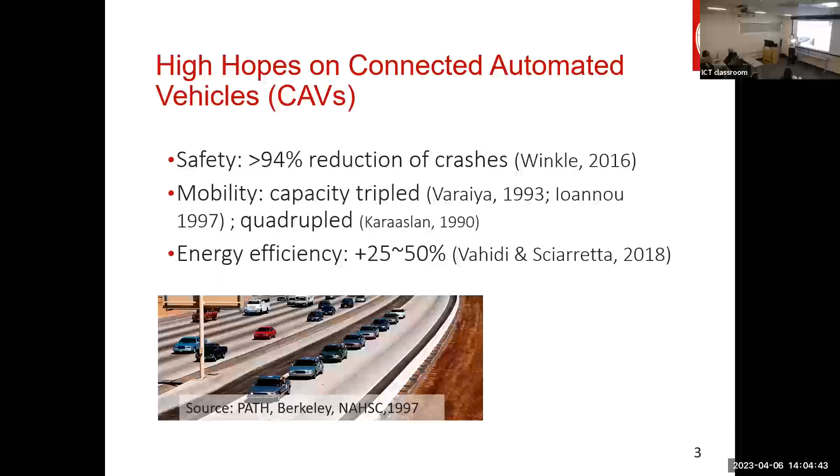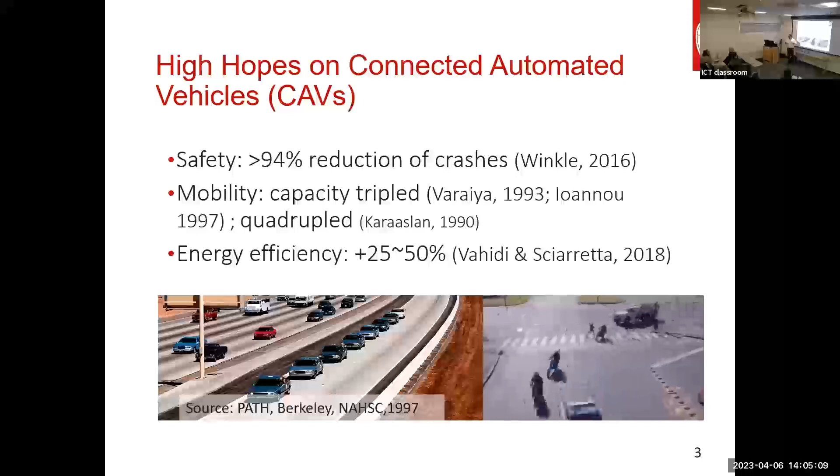What was exciting was that this technology was demonstrated like 25 years ago on a California highway. We had vehicles connected and automated, demonstrating some of these potential benefits. Back then, I think people's vision would be like this: one day our traffic could be like that, with all road users sharing the right of way harmoniously without stopping at the intersection, although I'd be scared to walk across the intersection like that. But it's computer graphics, don't worry. It shows an idea, at least from the vehicle automation perspective, of how the transportation system would be envisioned.

So let's look at throughout these 2-3 decades what happened, and there have been lots of exciting developments in the real world, right? Lots of deployment of automated vehicle technologies.

You've seen all these different brands of vehicles that have automation and provide various services, including ride sharing. Besides passenger cars, you'd see shuttle buses, micro transit shuttles and trucks, and some small delivery robots, and even for restaurants, right? They try to provide robot waiters and waitresses. I saw this in one of the hot pot restaurants in Madison. I'm not sure if you guys have it here, please check it out. So all these technologies are about automation and transportation.

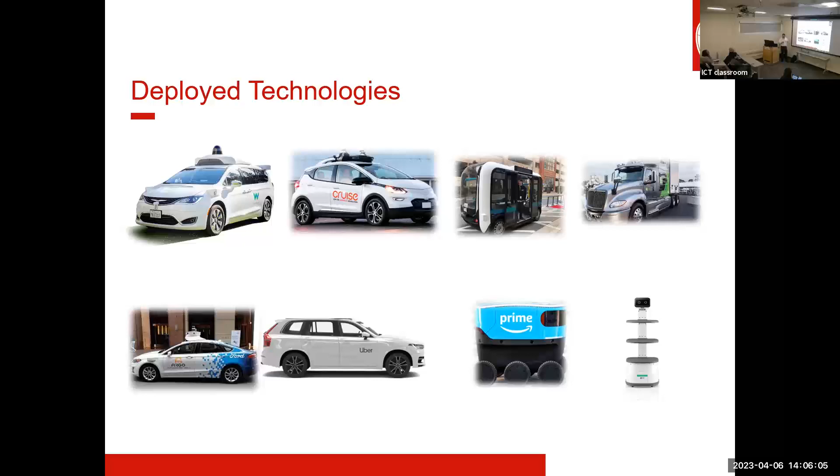Very exciting. Overall, I call them production automated vehicles, and they have grown a lot. These are the vehicles running on our roads, from 2% market penetration rate to around 10% at this time, with a projected 40% in 2040.

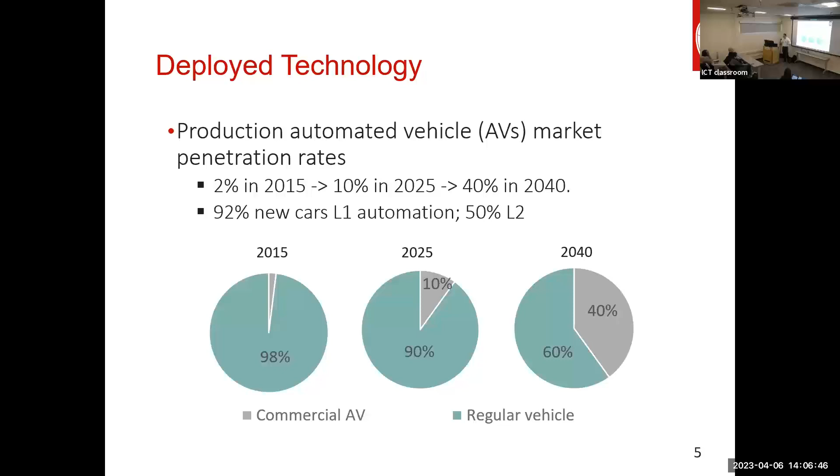If you look at newly produced vehicles, 92% of these cars have capability of level 1 automation, that is longitudinal control, and 50% of these new vehicles at least have a trim with level 2 automation, meaning both longitudinal and lateral control. The particular technology people refer to for this is called Advanced Driver Assistance Systems, or ADAS.

The longitudinal control component is often referred to as adaptive cruise control, ACC. This is basic control, controlling the subject vehicle to follow the preceding vehicle automatically depending on spacing and speed difference. Today I had a ride with Akash, and his vehicle had this function. It's like you can set it up like cruise control, but on top of that you can decide the headway of following. Normally you'll see 3 or 4 bars on your dashboard showing the headway you set to follow the preceding vehicle.

I wonder how many of you have this kind of car or have experienced it? Okay, alright, almost half, right? I would consider that great, looks like this is not a futuristic technology.

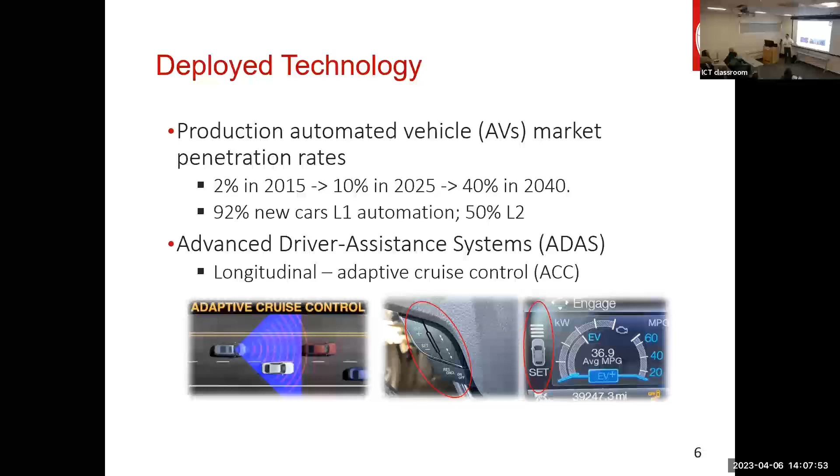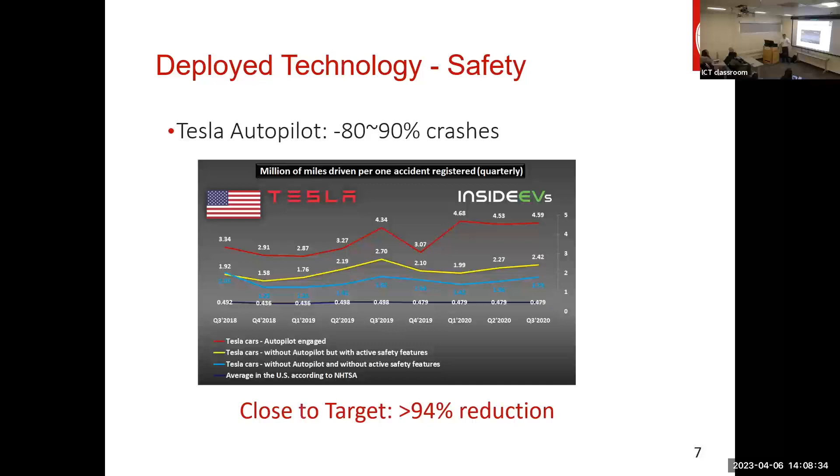Let's look at how well they perform against the high hopes I showed in the first slide. About safety, at least from self-reported data from companies like Tesla, the safety improvement is significant when the system is activated. It looks like they can reduce the crash rates by 80 to 90%, just looking at their self-reported data. Despite that, we know we are on the right trajectory to improve safety, and they put safety as a focus, so they're on the right track toward the 94% crash reduction target.

What about mobility? Let's narrow it down to capacity. We collected field data for human-driven vehicles and ACC vehicles from different automakers, and compared their flow rate over density, where the highest point is about the capacity. Against the high hope for capacity improvement, it looks like they're more or less the same. Even if you put it to a longer headway, the capacity could be even lower than human-driven vehicles. This is far from the hope of multiplying the capacity - we're still far from that target.

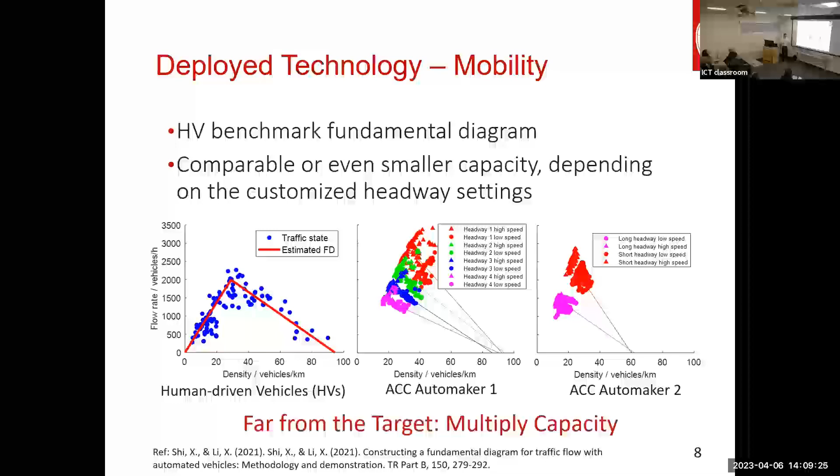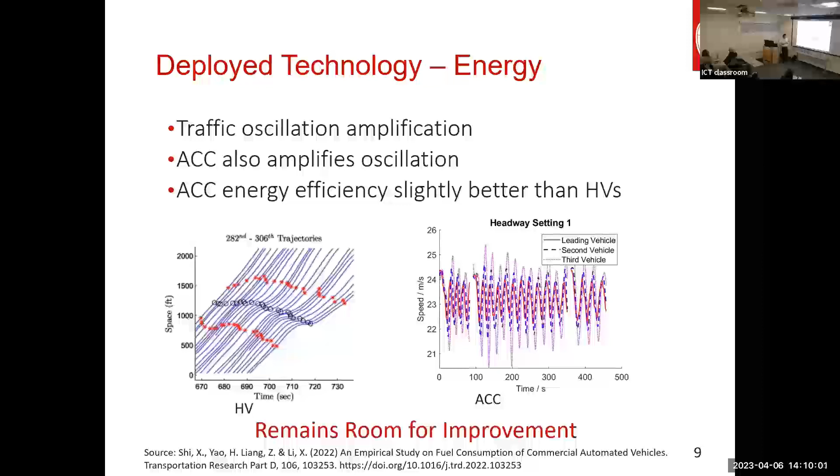What about energy? Again, you can collect vehicle trajectory data, either location or speed trajectories, from human-driven vehicles and ACC or AVs, and use energy consumption models to study and compare energy consumption. We found that ACC energy efficiency is slightly better than human-driven vehicles, but not by much, still far from the 50% or higher improvement benchmark. So there still remains room for quite some improvement.

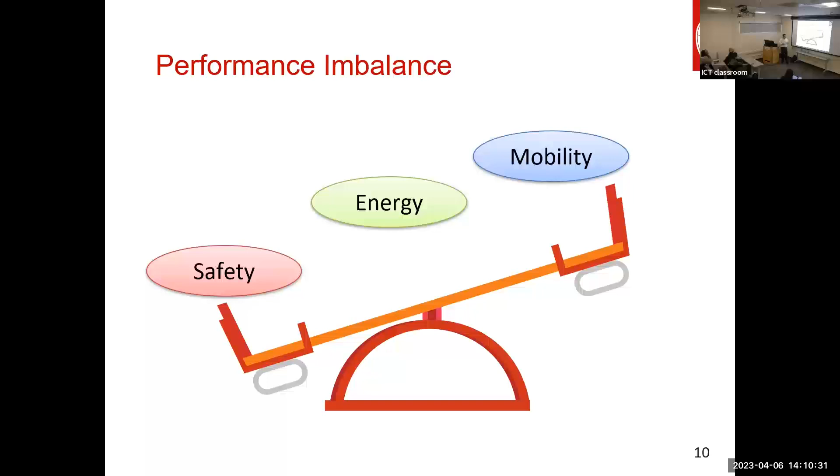From what we observed in the industry and in deployed technologies, people put lots of focus on safety and keep pushing it better and better. But mobility hasn't improved that much - you guys have ridden some of these vehicles, right? And energy is also a secondary consideration. This is quite different from the vision we have from a transportation system engineering perspective, as I cited before.

This is our vision, and I believe in the past decade there have been, if not thousands, then hundreds of papers talking about how to optimize vehicles in the system and control their trajectories, but only on computer. Why haven't we seen this kind of technology employed in the real world? I was wondering that question.

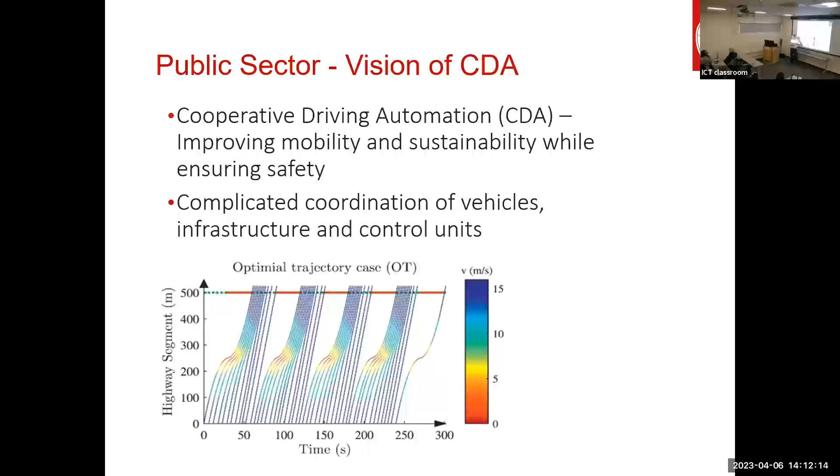So I actually built the lab, as Lamar mentioned. We started an initiative of building some hardware. I thought, on top of the research paper, let's try to implement some of this. The first thing is, we're given one trajectory, and we want to have a vehicle follow exactly this trajectory.

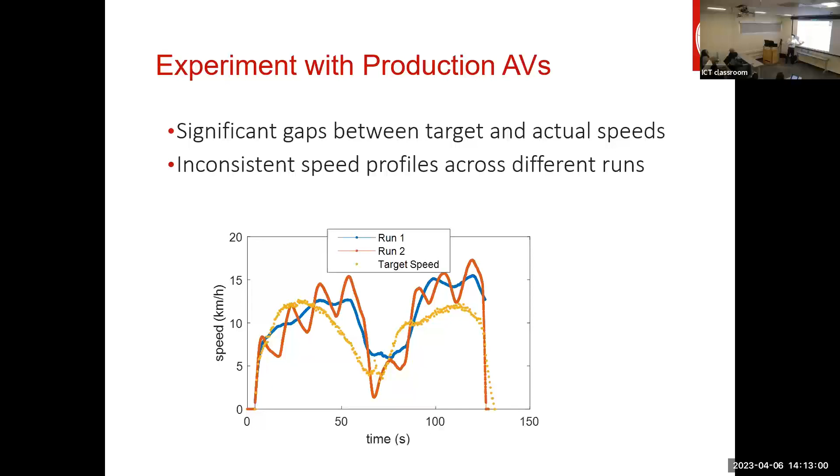So that brought our group's attention to the actual control versus the ideal trajectory we want vehicles to produce. We have the ideal smooth trajectory, but due to limitations of existing vehicle control, you may not be able to have this vehicle follow the target trajectory exactly. There will be errors over time. What can you do? Maybe you can add a safety buffer.

As long as we add sufficient safety buffer to absorb the errors, we can still do this kind of control. But this brings a problem: how much safety buffer do we need to add to make the system safe, how do we quantify it, and would that impact mobility or safety?

In the past, if you're familiar with transportation systems research, safety and mobility are like going on two different tracks with different approaches. But this is an opportunity to integrate perspectives from both safety and mobility, as well as energy and stability, in one shot.

So let's look into how the imperfection of automated vehicle control leads to trade-offs between these different elements, and if we know the limitations, how we can improve the system. I'll talk about some of our studies, first from an analytical model, then field test verifications, and finally some ongoing work on how we can improve the system.

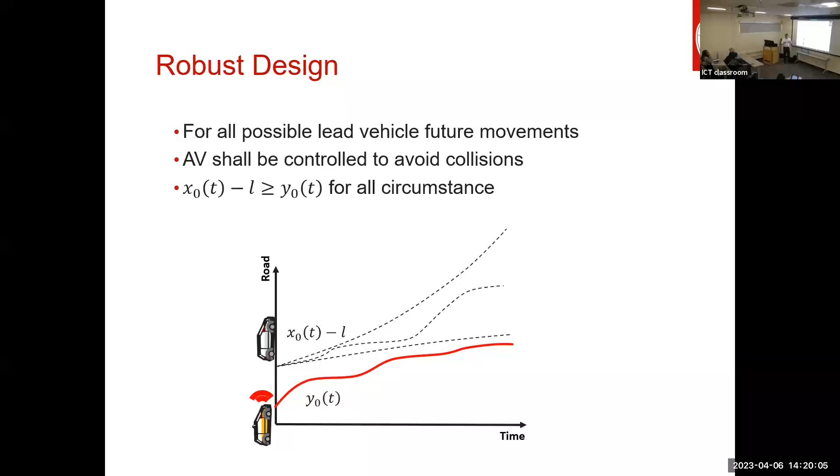The idea is y0 may overshoot and encroach into this safety buffer from time to time due to imperfect control. And we want to make sure that this overshoot never exceeds the safety buffer. So that's the purpose of this safety buffer.

If you translate this into a math equation, it's going to be like this. Don't worry about the math. It basically means that we need to design the delta to absorb all the overshoot across all circumstances. We have some very general initial condition and some vehicle dynamics, and we don't assume any trajectory form of the preceding vehicle.

We just consider that the preceding vehicle has acceleration limits and speed limits, which is true for real-world mechanical vehicles, but it can decide its own movement within this constraint. So it comes with the form of robust optimization.

So it's a complicated equation. The decision variable is like an infinite number of decision variables, and differential equations are really complicated. You would think it would take tons of effort to solve it, but you know what? I spent quite a lot of effort sitting for 2-3 a.m. for a few nights and used MATLAB, and eventually we solved it analytically.

This may look complicated, but this is an analytical solution. It's not that easy to solve a mathematical programming problem analytically always, but we did that. Actually, this is really complicated, but you can look into some simpler or special cases which are still very representative.

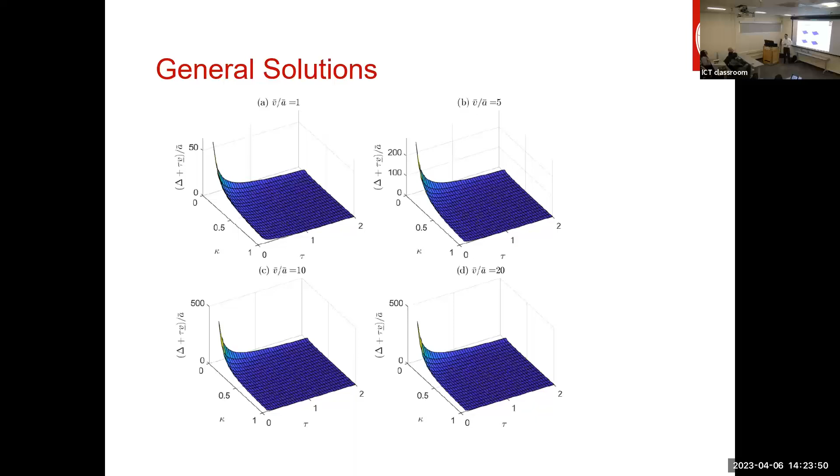So that result is quite elegant. What that means is, let's look at the relationship between tau and delta. If you want to improve the mobility, you probably need to squeeze tau a bit, make it shorter. With the same technology configuration, you'll probably need to increase delta, which makes the safety requirements more demanding and stringent. All right, that's one aspect.

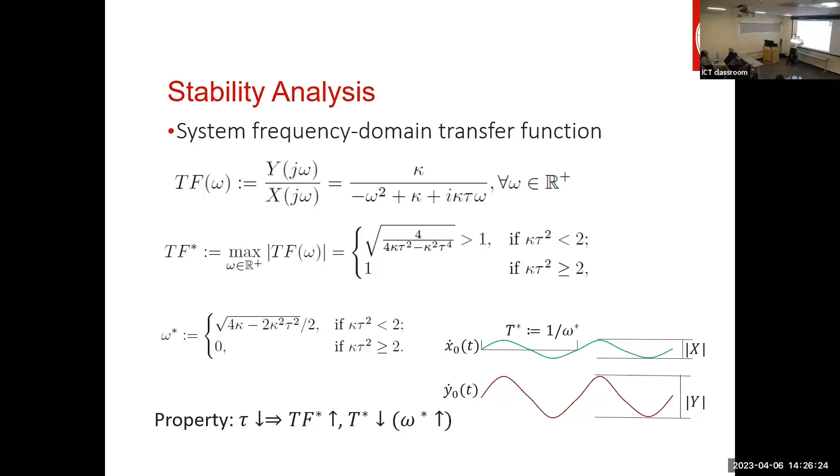We also looked into another parameter, sort of a dominating magnitude, which is the oscillation cycle of the speed profile. If the system runs like that, you also find that if you reduce tau, this oscillation cycle is going to reduce. That means if you reduce the headway, you're going to have a bigger oscillation amplitude of the subject vehicle in shorter cycles, meaning more abrupt deceleration and acceleration, which means worse stability and more fuel consumption.

So with this, we have theoretically proven that with this model, if you want to design a first-order model and make it safe and efficient, you'll find the parameters have this kind of trade-off relationship. That means if you want to improve mobility, you have to sacrifice safety, and you may have higher traffic oscillations and higher energy consumption.

I actually did this pure theoretical work myself—I think this is the only paper over ten years that I wrote myself. For most of my work, I just do the talk, and my students do the actual work. Then one student came to me and said he didn't believe me, that this is just theoretical work, and you can't prove anything real. I said, okay, now you're smart—now we have vehicles, why not bring them out to the road and test whether it's true or not?

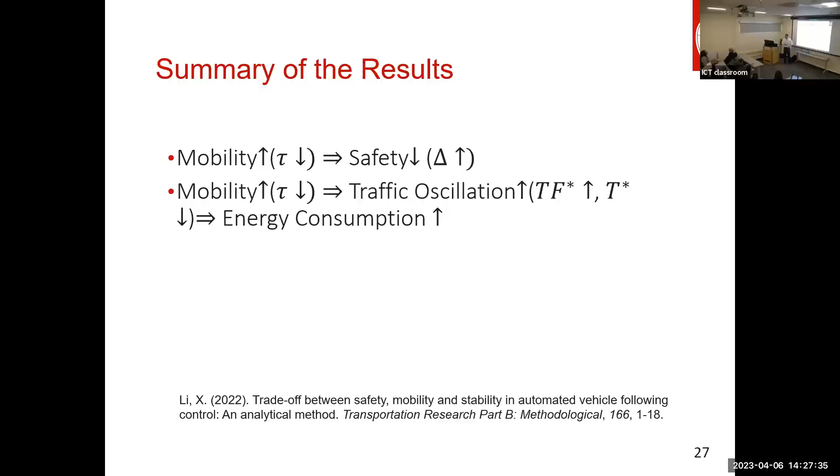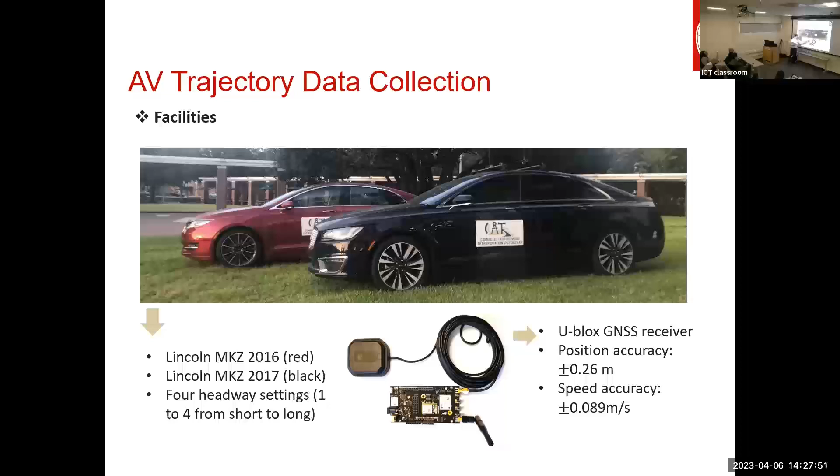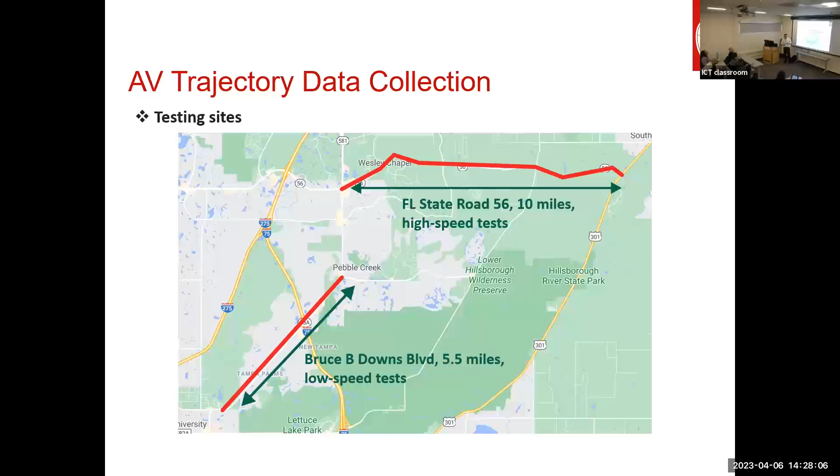He did that. So we have lab vehicles, retrofitted from commercial production hybrid vehicles, equipped with ACC. We added components to collect data, like high resolution GPS, and had these vehicles drive along public roads, with drivers there, but turned into ACC mode—maybe some of you have done that if you have ACC cars. We did a bunch of experiments, like two cars, two AVs following each other, two AVs following another AV, and we tested different speed profiles.

So my student knew how badly I drove, so he actually asked me to just sit in the passenger side to record the data.

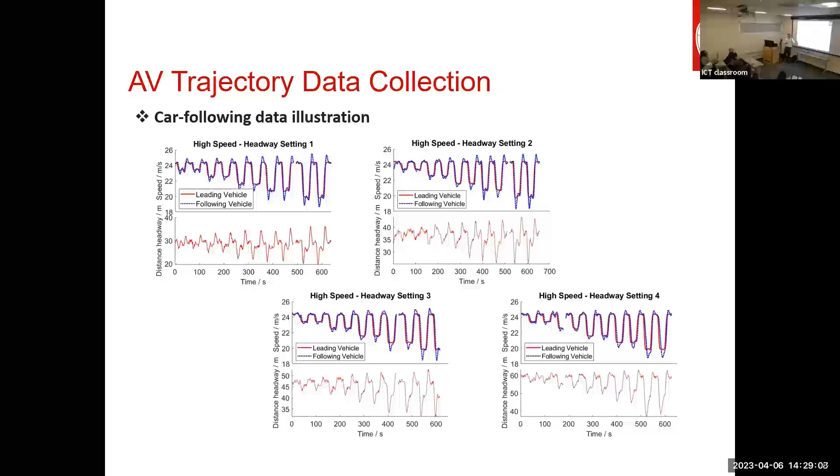So here are the results. We collected data and tried to fit it with the model, the first order model I had. You can do regression to get parameters like tau, kappa, and delta. And the fitting is pretty good.

Look at this. You have a first order linear model that isn't perfect, but you can still get quite good fittings. That means this model will reasonably explain the trade-offs, at least from the first order.

If you look at the headway changes, headway 1 is the shortest, 4 is the longest, you see tau increases. Actually kappa decreases, and delta decreases. These are exactly what our theory predicted.

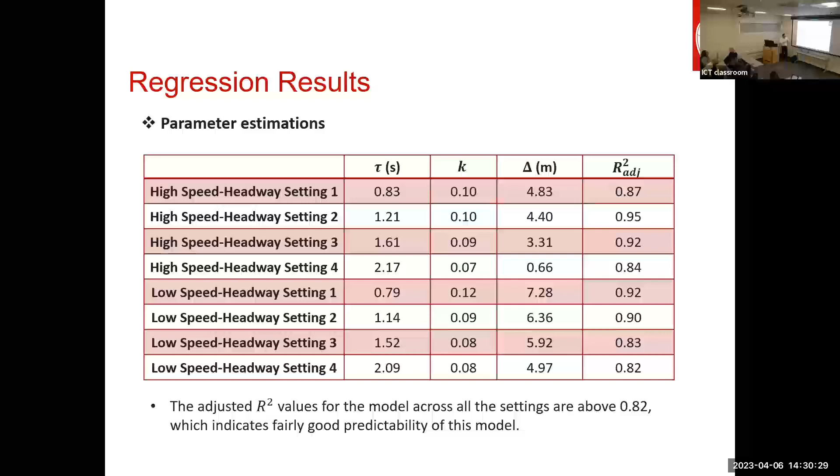For different speed ranges, we had the vehicles run at different speeds to capture some of these nonlinear areas. Still, you see low speed and high speed, this relationship is exactly the same as the model prediction.

Here are some results. Headway settings show different taus, meaning different headways correspond to different taus in our model. And headway versus following gap.

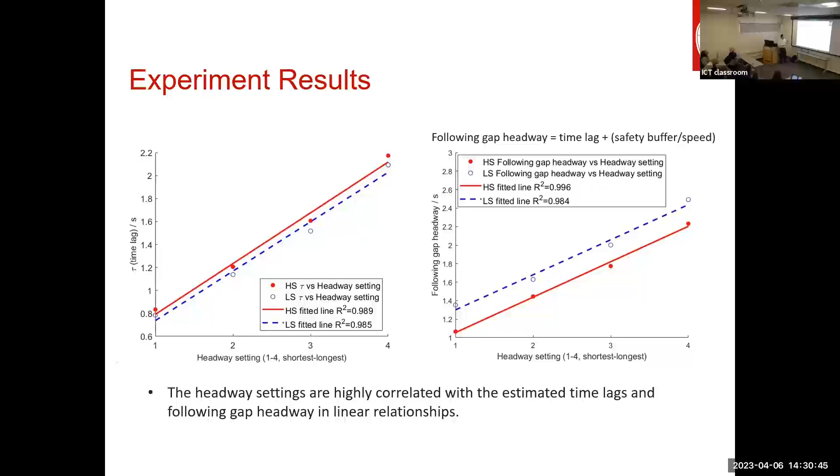These are some of the intermediate results. These graphs show the trade-off that I predicted in the theoretical analysis. So as tau increases, delta decreases at different speed ranges.

There is some nonlinearity that our first order model doesn't explain, but at least from the first order you can see the decreasing trend has been captured. As tau increases, kappa decreases. Actually, for both speed ranges, this kappa overlaps very well, with less nonlinearity.

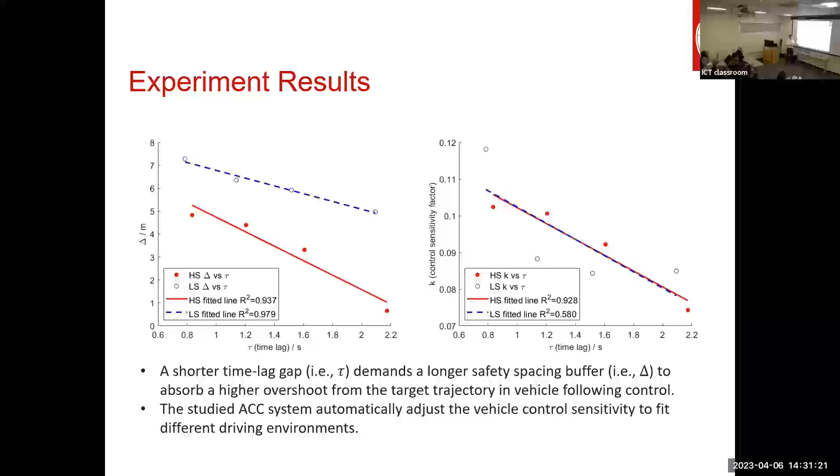We also tested stability. We have different headways and different oscillation cycles of the vehicle's speed variation. We recorded the transfer function, which is the amplification from the lead vehicle's oscillation to the following vehicle's oscillation, and the maximum corresponds to the dominating frequency.

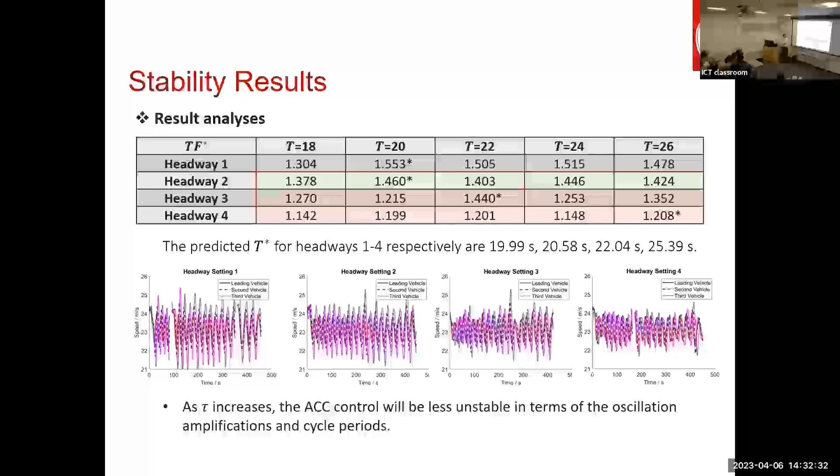So we also tested the models with data provided by a different institution, and we have this consistent finding.

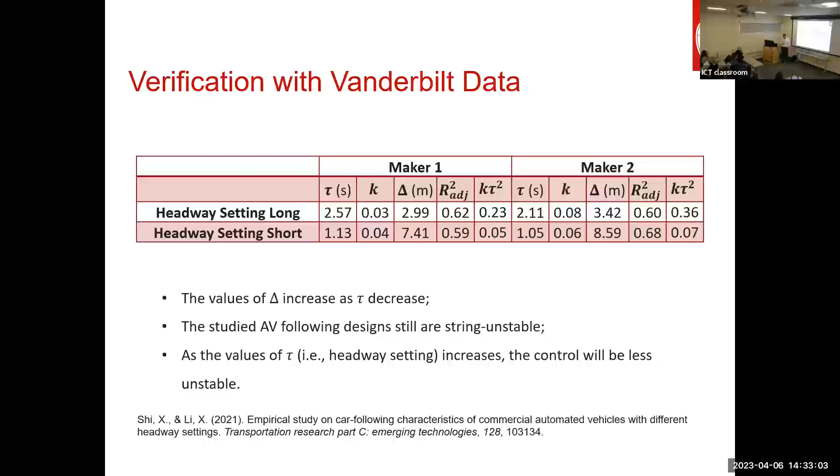Now this student - he's Tom Shi, and he's now a postdoc at the University of Michigan - he said, okay, this looks interesting. So maybe the theoretical modeling does help sometimes. Not always, but this time it explained what happened.

So now we know there is a trade-off. This trade-off was somehow intuitive to me originally, so I wanted to show that theoretical work to my students, and I was pretty confident, and then I argued against it. Because you can imagine that if you want two vehicles to follow closer, the following vehicle needs to react more agile, and that may create stability issues.

But the nice thing about this work is it defines the problem rigorously, and we have an analytical solution, and we can also verify that with field experiments. Now, the next issue would be, how are we going to improve? Are we going to just be stuck here?

And if we are stuck here, we're never going to realize the vision we had in the first place, right? We improve safety while we multiply capacity. That's never going to happen.

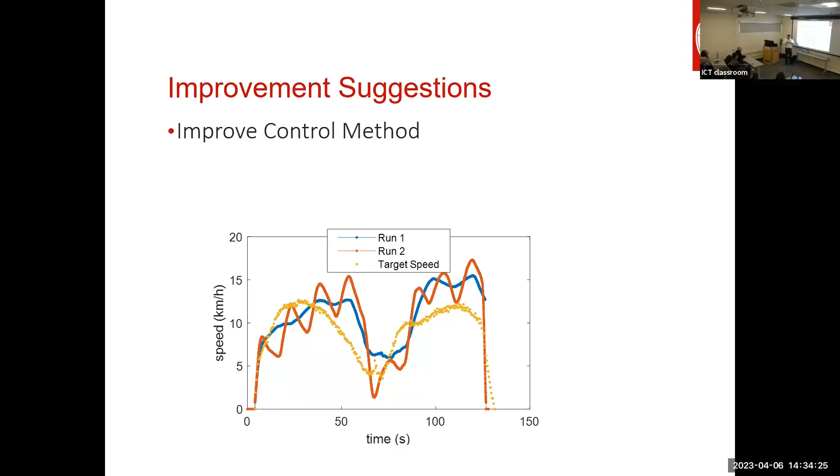So how can we improve the AV technology that we have today to reach some of the visions that our pioneers had before? Of course, if you have this kind of control, as I showed, the vision is never going to happen. You can almost impossibly reduce the vehicle gaps. They're going to collide into each other terribly.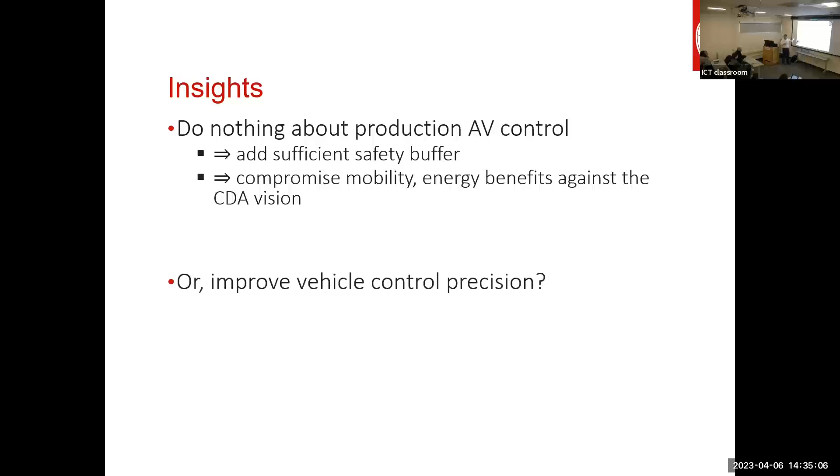Or we can improve the fundamental control, make it better than that kind of linear control, all right? So one direction that we explore is to really try to improve the control method. We could use predictive information for model predictive control, and also use some learning techniques to really offset the actual control error and the predicted control values.

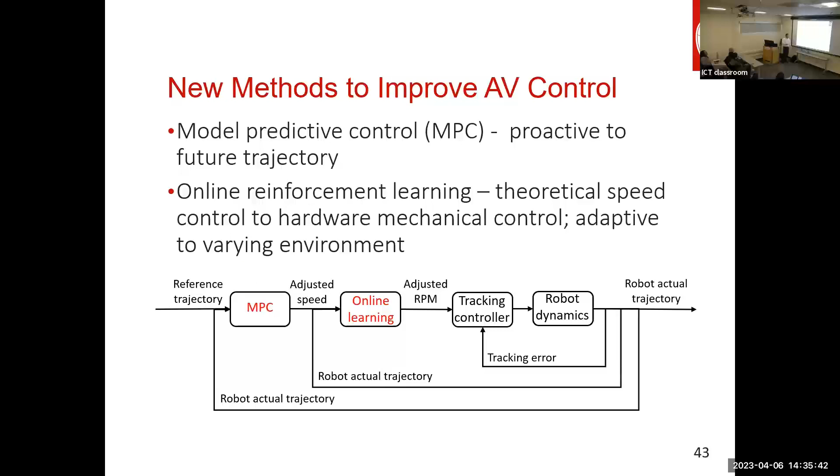So we did some very early study, just concatenated online learning and model predictive control, and we actually developed some models, but we also did some small scale tests. It's just a small student project. You could spend a few hundred dollars to construct a mini scale connected automated vehicles test bed.

This is about $100 or $200, and you have some paperboard. You have a circular track, right? That costs almost nothing. Then you can add some of the other sensors, and you can use Wi-Fi routers to connect them.

So we tried those traditional PID-based control and our online learning based MPC, and we found that we can improve a lot of the control error. You see here a big difference between the actual trajectory, which is the blue dots, and the reference trajectory, the target trajectory, the red curve. And now we close it a lot better.

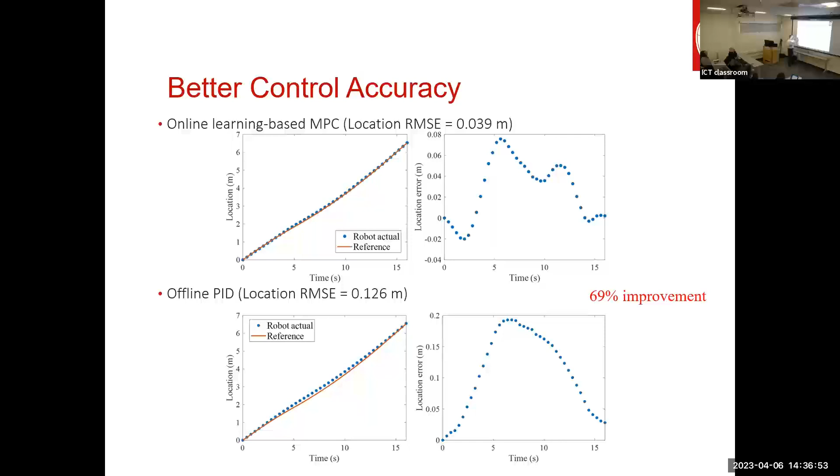Even with that kind of shabby equipment, that kind of vehicle is really difficult to control. If you worked on it, we can improve that error by 70%. That means this direction is promising, right?

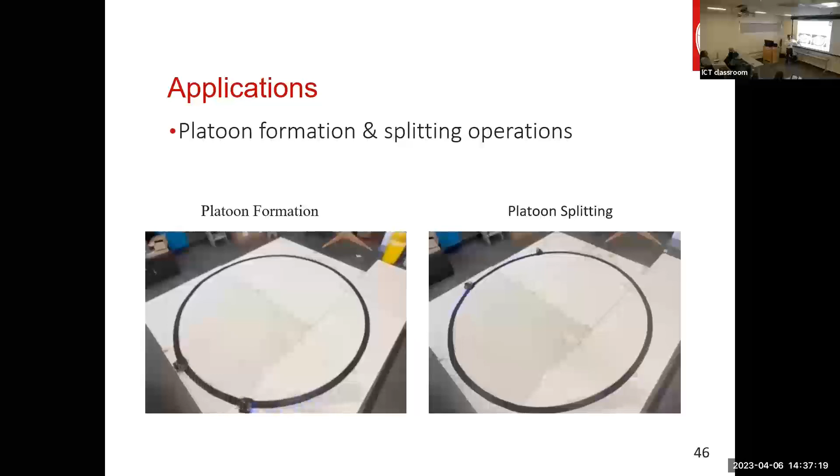And with that, we could move one step forward — if you can do control better, that means you can have a shorter safety buffer, and then you can platoon them closer and achieve some of this mobility and energy vision. So we did some experiments for platooning, like formation and split, on this small scale test bed. We're not satisfied with that.

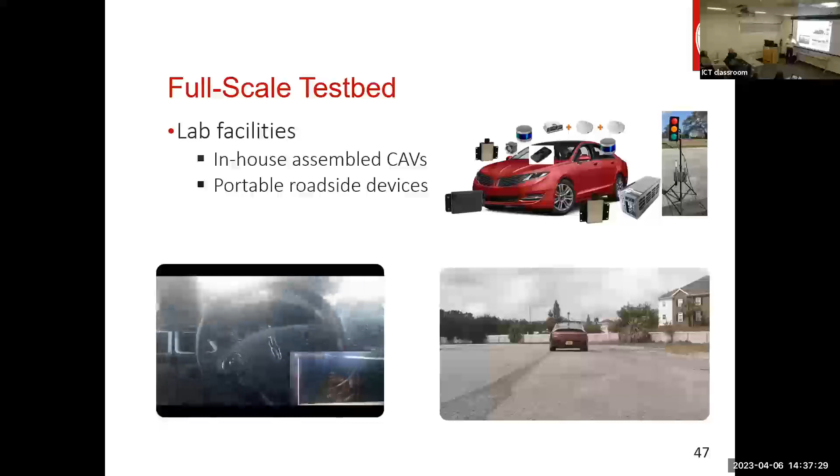As I mentioned, we built a full scale test bed. Our students were really talented, and we built this in-house. Actually, another reason — I don't want to tell you, but we were short in budget. We couldn't buy the vehicles as a whole. We had to get some components here and there, but that was a helpful experience. We learned the ins and outs of the system.

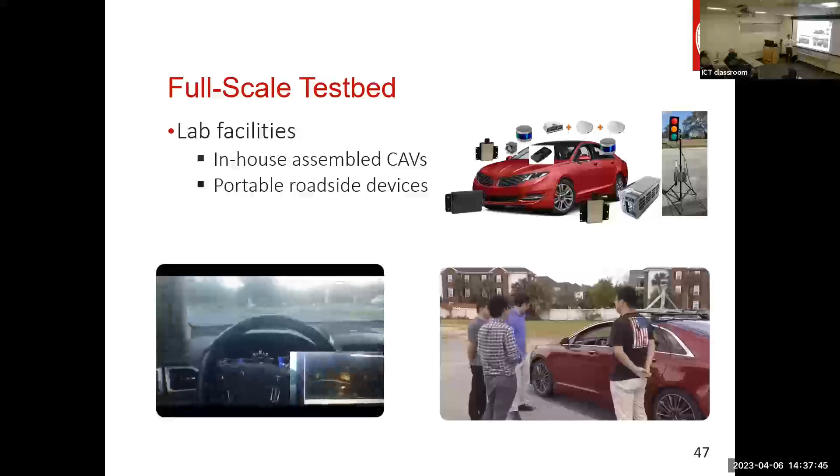Of course, if you have this kind of system, it's a good showcase, right? Whenever important people or nice visitors come, you can show off. But more importantly, you can do some field experiments with this kind of platform. For example, this is the experiment that we did for longitudinal trajectory control in coordination with signal timing.

There is actually downstream of this road a traffic light that is red currently and will turn into green phase. You have one vehicle here that is a CAV. The other vehicles are just human-driven vehicles. The human-driven vehicles will just drive as usual and make a stop at that intersection. But this vehicle is smart enough to learn the signal timing plan and will adjust its trajectory to pass the intersection right about the same time.

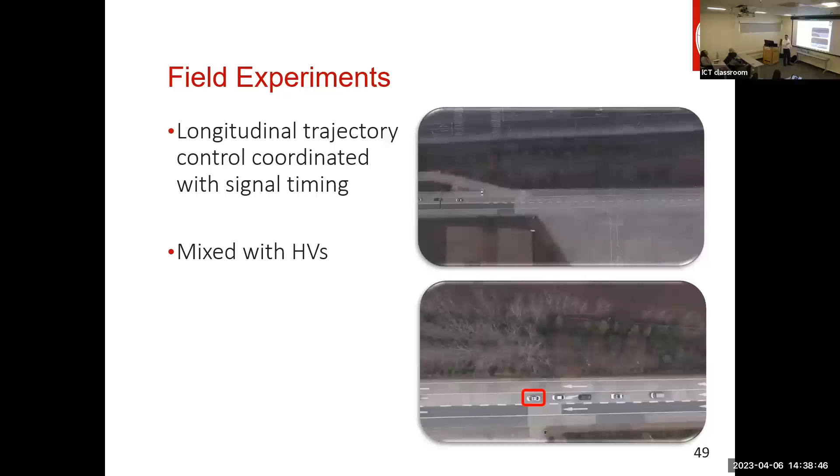Let's see — basically this vehicle will just proceed to the intersection and make a full stop. And this vehicle does good timing and passes without any stopping. You can see it again, it just calculates exactly when this vehicle will leave the intersection, making sure you can follow the stream, not too long a gap, but not stopping.

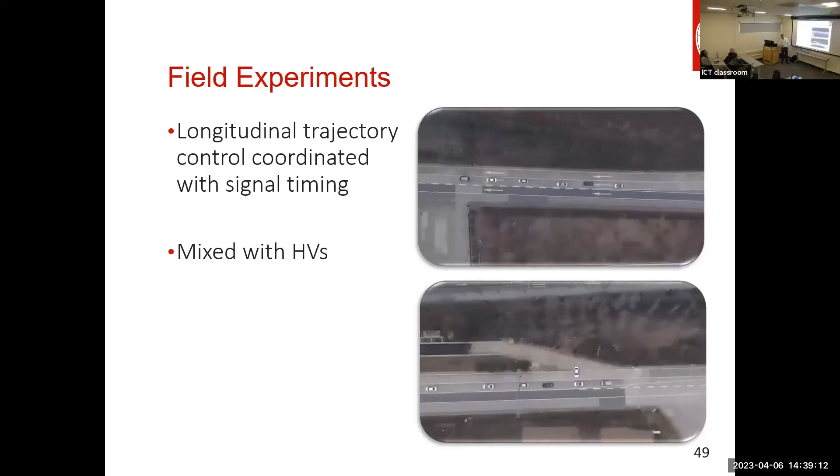There is another experiment with one downstream vehicle, and it's going to stop there, and you're going to join that time when it leaves, right? So very interesting.

Of course, automation alone may be limited. You need to have connectivity. That's why we say it's CAV, right?

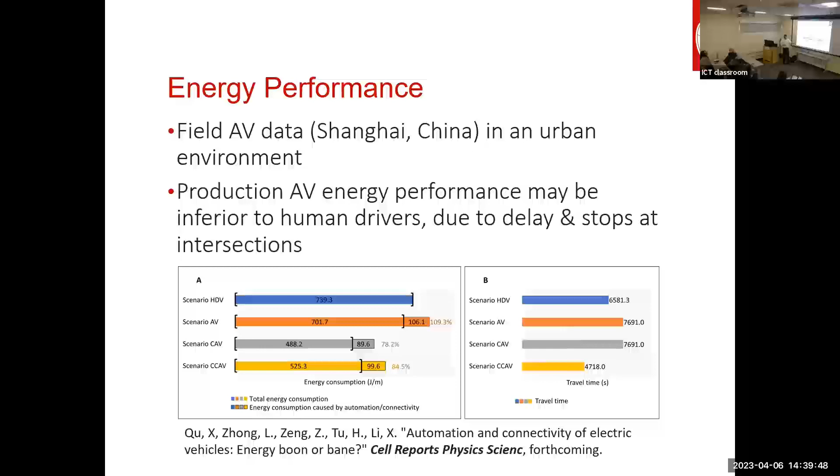So we actually did some work in collaboration with other institutions, pieced up our data, and did some predictions. We found that production AV energy performance may be even inferior to human drivers in urban environments due to delay and stops at intersections, because it didn't communicate with the intersection very well. They had lots of wasted time and energy out there. So if we have connectivity, we can improve it.

We also work closely with the US DOT Cooperative Driving Automation Program. We're actually the first external team that has demonstrated their CARMA system successfully in field tests. We have a joint demonstration — I think I should show you a nice video here — these vehicles actually jointly demonstrated platooning functions in a test bed. We already gave you some nice news release at ITS Congress last year.

We're also creating some fancy technologies for low-cost communications. For example, you can use a light board with different flashing patterns of LED grids to communicate information. That's faster than what human drivers can perceive, and can communicate most of the critical information for cooperative driving applications.

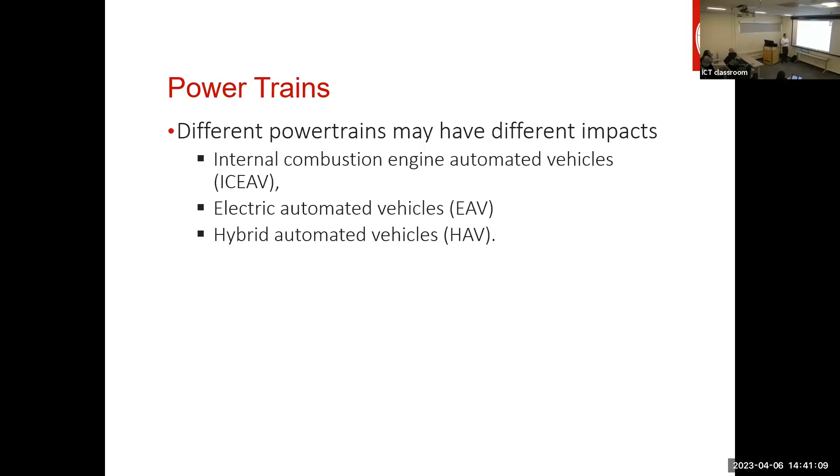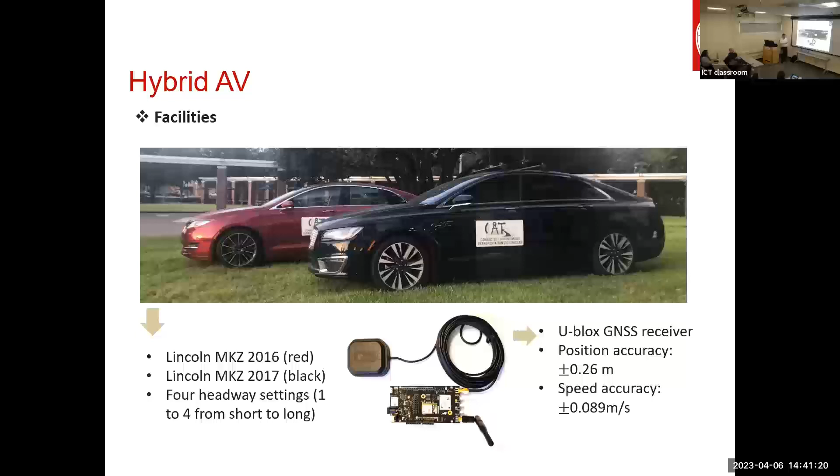Of course, another aspect is we looked into the powertrains, right? Maybe if you make that powertrain work better, more responsive, you can continually improve the outcome. We compared different powertrain technologies using our vehicles, which are hybrid vehicles. We already have the data, and we also had some ICE vehicle data downloaded, contributed by other people. I also had very generous students — one who had a better status than me, with Chevy vehicles, but also a nice Tesla.

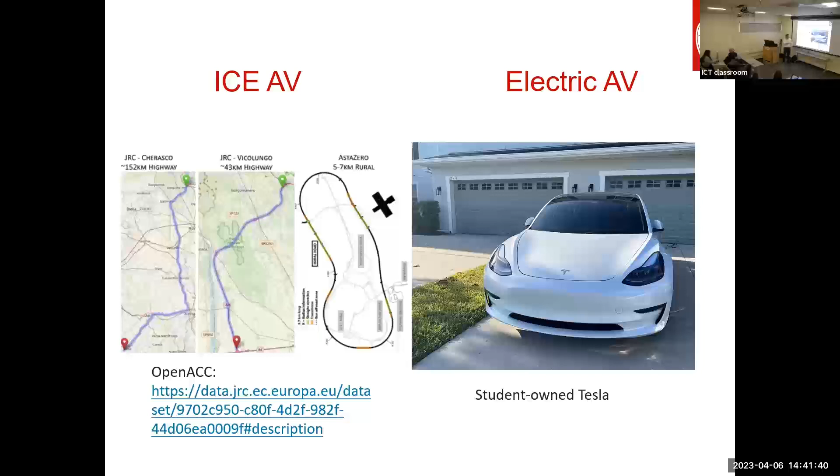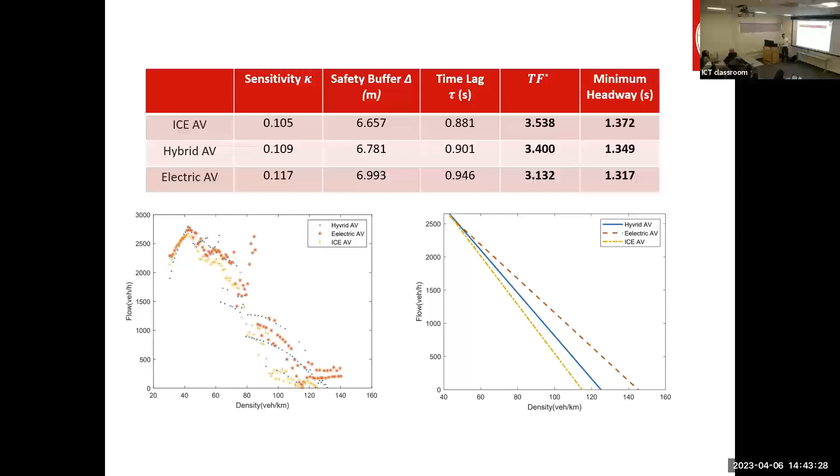Thank you for a nice presentation, Professor. In your second slide, you mentioned something about the optimistic expectation of tripling and quadrupling the capacity of highways with the introduction of autonomous and connected vehicles. Could you use this model to estimate the actual, or realistic, enhancement in capacity? And if we talk about using this model to estimate the realistic enhancement in capacity, are we talking network-wide? Are we taking into account intersections, or are we talking about just freeway?

Yeah, so this model, once the model parameters are obtained from the data, you can convert them from the microscopic headways to macroscopic traffic flow rate, density, and speed, and construct a relationship of the macroscopic traffic flow capacity measures. So that we can do that. It's just that I think the key is what kind of data you can fit, and then you get the key parameters.

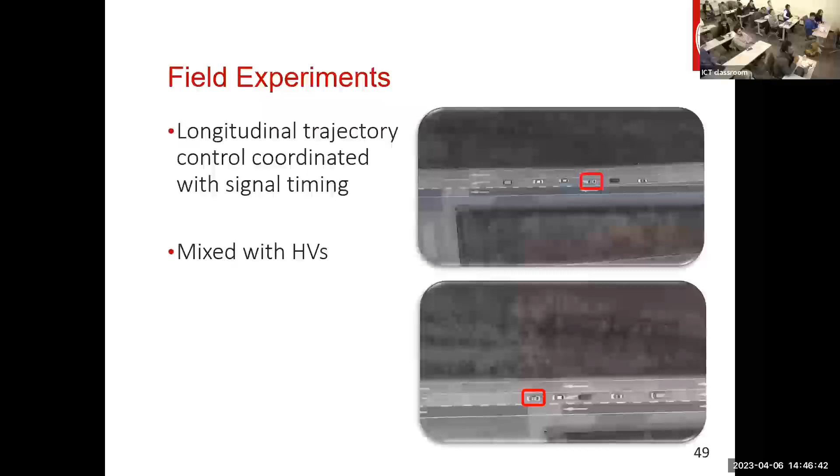I can only answer the question for trucks theoretically, because we could not afford an autonomous truck yet. But maybe after you get the test bed, we can verify your problem here. I can only speculate. Because truck control is, to a certain degree, less responsive—it takes maybe longer to brake a truck to a full stop. So I could imagine the sensitivity K is maybe smaller, and if you want to compensate for that, you may want a longer headway. That's my speculation, don't quote me, we have to verify that here at this great facility.

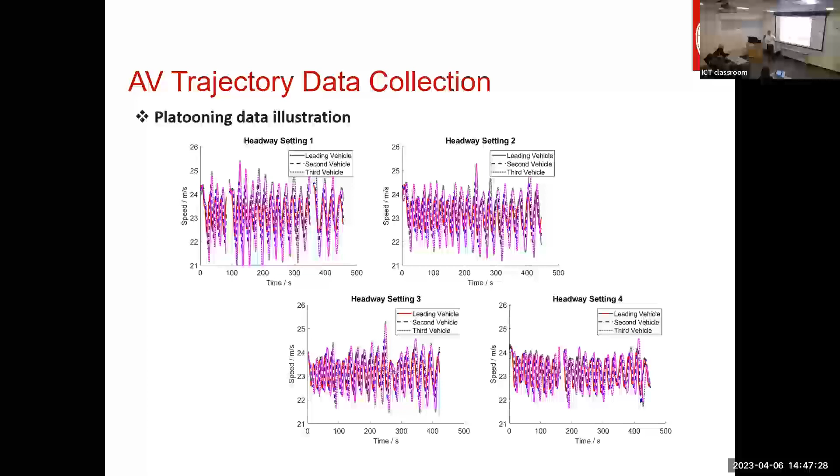Yes, okay. Well, thank you. It's great to learn the great things you are doing.

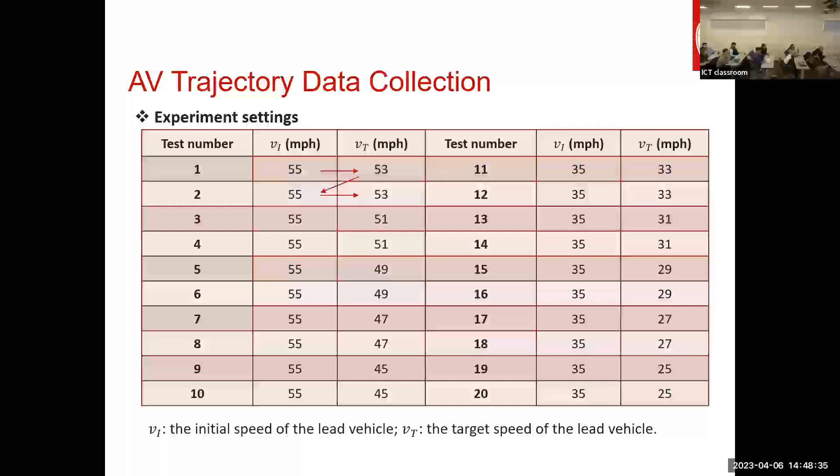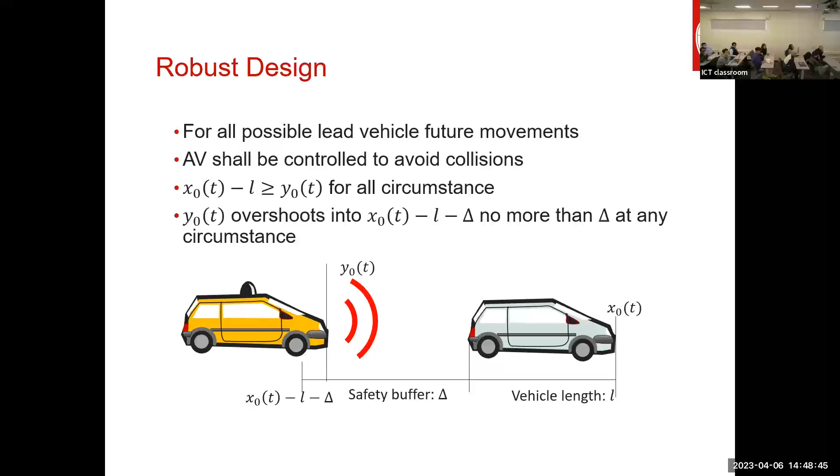That's wonderful. Two questions actually, related to what you presented. One is when you are doing this robust control design, it seems you are considering exhausting all those different possible parameter sets. Do you see any potential uniqueness in the solution when doing the design? You are doing sort of optimization, right, looking for that solution. Is the solution unique, and does that have impact on the findings? That's one question, maybe I'll give the second next.

All right, let me better understand your question. So you're saying, is there any unique structure? Uniqueness—yeah, because although this is the general solution, if it's really complicated, I have to define some special operators.

Well, maybe let me rephrase my question. I was thinking you have this delta, kappa, and tau—could there be multiple combinations of these values that yield very similar results? I was wondering whether these are correlated local optimums. No, it's not. It's theoretically proven that this problem is a convex problem. Well, it's linear actually, in a way, because the model is linear.

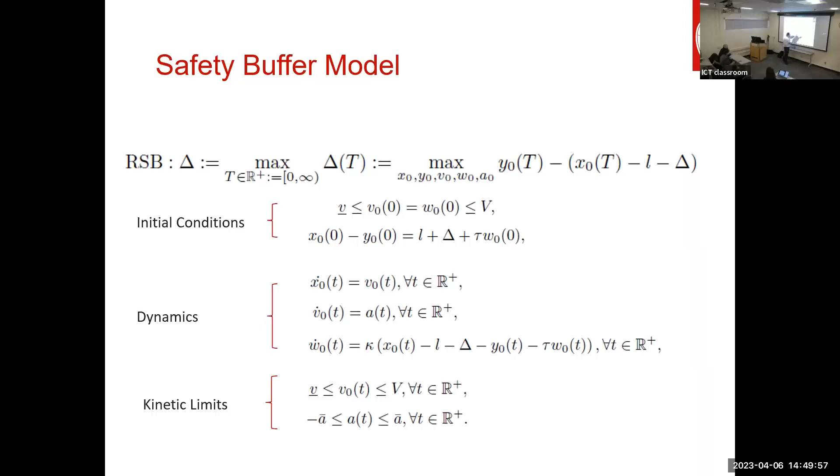So I think it's sort of like a linear program, because the model is first order—otherwise it's difficult to analytically solve. If it's analytically solved, we use control theory like the maximum Pontryagin principle. So basically this is a solution of a KKT condition. Oh, I see, there's only one solution, so that's it, right?

Oh, that's great. The second question I have is related to you talking about sharing a little bit of information—essentially connectivity in a sense. I was just curious about the string stability issue—will that really be improved a lot by sharing information across vehicles, V2V?

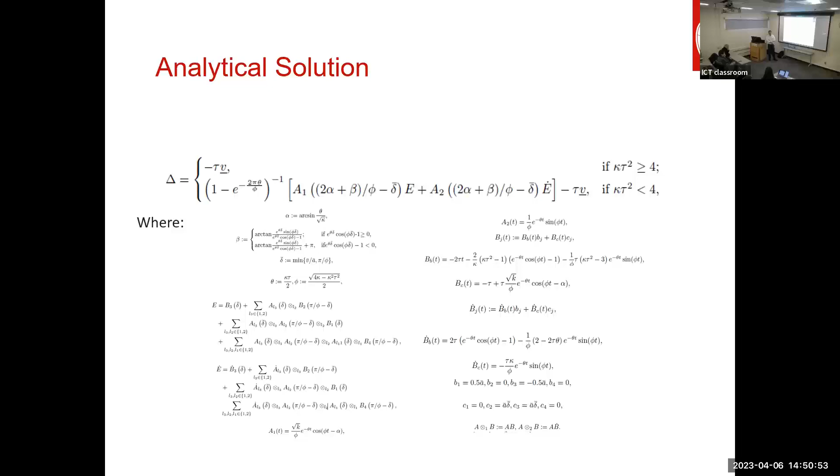So I was wondering, right now you are really considering autonomy, but then a little bit connectivity - did you explore that direction a little bit? If we're doing a formation, platooning and so on, where vehicles are sharing information, would that really improve the current trade-offs you have? Right now you have a Pareto frontier between capacity, safety, and stability. I was wondering how much impact connectivity would make on that trade-off.

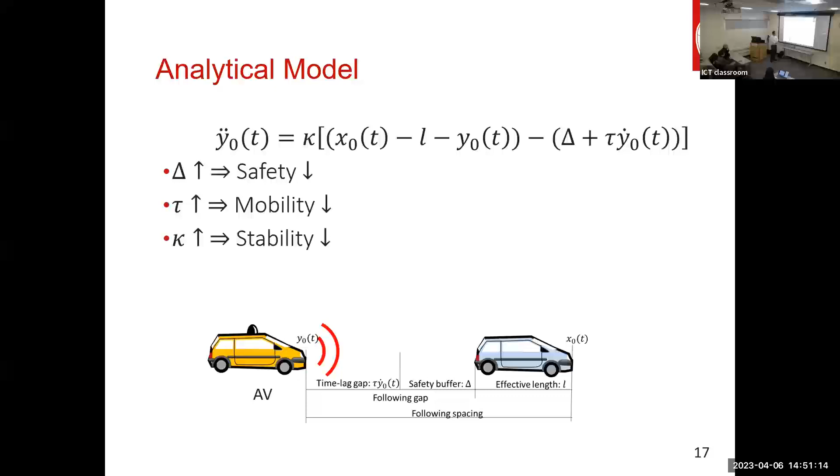Right, so I think if you just look at this linear model structure, it essentially falls into PID control. It's reactive, based on Markov state. It doesn't have memory of the past and doesn't have information about the future. Right, so that's what most car-following models and control are based on.

But if you have connectivity, at least you can have a bit more information about the future vehicles' behaviors. If you have that kind of predictive information, you're not going to use this form of control - it will do a lot better. But if you just use this form of control, it's limited by the theoretical prediction. There has to be some trade-off. If you want to push the Pareto frontier further, of course you have to improve this.

One thing is, giving you an example, if you can increase this kappa value a lot, then maybe you can improve safety and mobility simultaneously, but that brings local instability issues, so it's really difficult to work with this kind of model. That's just what the theory governs.

You have to come up with a nonlinear, predictive model - that's what we did in the second part of the presentation. I mentioned the learning and model predictive control that adds nonlinearity to it, and adds predictive information to it. That information can be provided by connectivity.

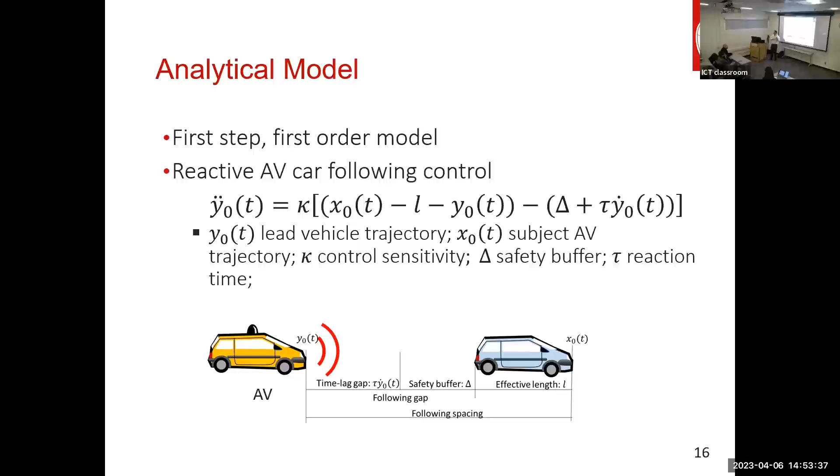Right, yeah, so I'm trying to paraphrase your question. It's like I have connected vehicle information, and how does that affect the safety buffer, right? Because when you also have a buffer in terms of how fast and how short that transfer of information can be, that may change how the vehicle should move safely or not, right?

Yeah, good question. I'll just follow up a little bit on my response to Dr. Young's question, right? Because currently the model, due to lack of information, uses more of response-based control. It's like the model I showed - it's linear and responsive. That means I don't know, for example, the target trajectory's deceleration and acceleration ahead of time. But you don't know that. You always want to get to the equilibrium state, which you project as a line if you're just doing responsive control.

The responsive control is basically equivalent to having a linear prediction of your future, right? Then you're going to be lagged here - you see some of the control. If this decelerates, you definitely have a lag here, and if it accelerates, you definitely have that too. With connectivity, you may know this deceleration and acceleration ahead of time. The preceding vehicle will tell you, okay, I plan to do a deceleration at this time.